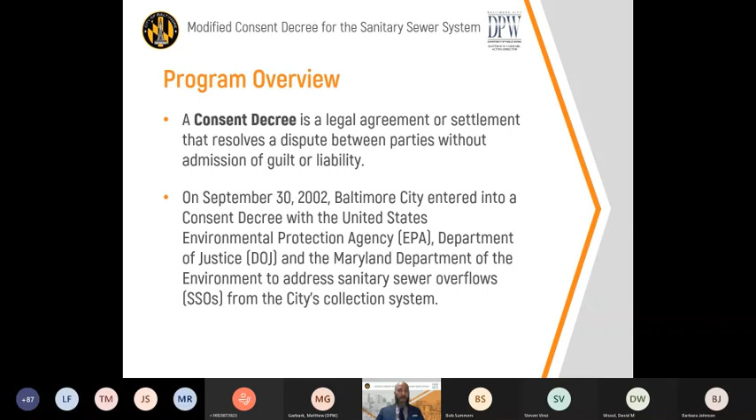So once we understood the scope of this almost 10-mile hydraulic restriction, it forced the city to reevaluate its plans to remediate the sanitary sewer system. And we went back to the drawing board with EPA and MDE and modified our consent decree.

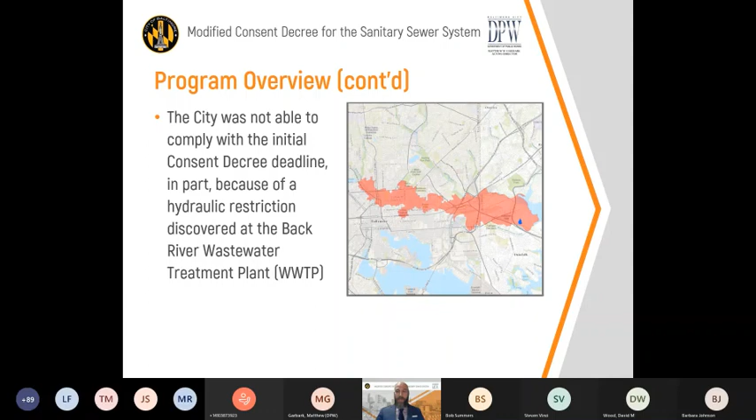So we're here today to do a couple of things. First, we want to give you some background on the modified consent decree. We want to provide you with updates on the work that we're doing to remediate the sewer system, really connect you to the people responsible for that work, and then we want to answer questions that you might have.

Now, when we drafted the modified consent decree, we didn't simply add a few more projects onto what we agreed to do in 2002. We did add more projects, specifically the Headworks project that is designed to eliminate that hydraulic restriction, but that's not all we did. We developed a new strategy that implements adaptive management concepts as seen in our two-phased approach, which creates a specific performance goal for our system. So we're not just completing a list of projects, we're completing existing projects plus the Headworks project.

That should reduce about 83% of the sanitary sewer overflow volume that we've experienced. Then we're going to step back, evaluate the impacts those projects have had on our system. And then from there, we'll design and complete any further projects that are needed to establish a certain level of protection, that performance standard. We want a 5-year level of protection citywide and a 10-year level of protection for sensitive areas.

Now, we also extended the time frame for compliance, and we did that for 2 reasons. First, we're doing more in the way of work, and I think we're making sure that we're doing things correctly. And extending the time also allows us to do work for less money. We only have so many contractors doing this type of work in the area, so we did not want to get artificially high bids for our projects by stressing that market. We want to stretch our ratepayers' money as far as we possibly can.

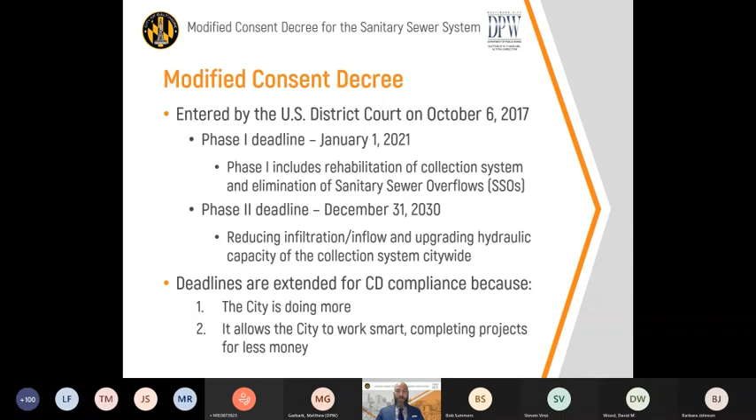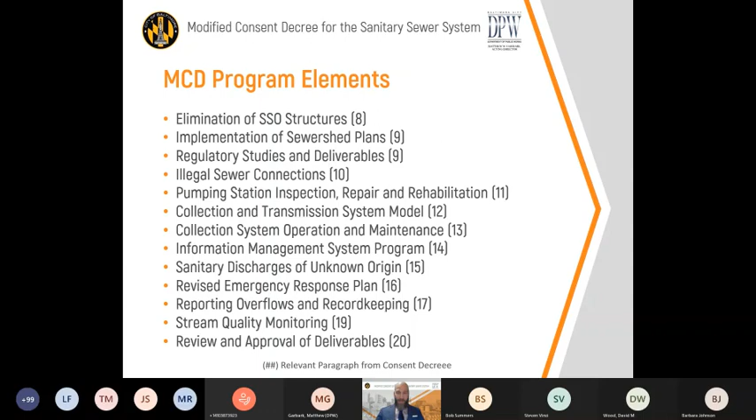Again, the modified consent decree is a relatively complex legal document, and it addresses the sanitary sewer system in a holistic manner. The various requirements are broken down into separate paragraphs, and tonight we are going to walk through some of those requirements. And the first will be paragraph 8, which addresses sanitary sewer overflow structures.

So SSO structures are essentially pressure releases that were designed into the system before the Clean Water Act was enacted. When a pipe section reaches its capacity and is unable to transport sewage, an outfall was constructed to discharge that sewage to a nearby stream. It had its purposes from an engineering standpoint, but it's certainly not good for water quality. It's certainly not the way we design the system today.

So we're going to eliminate them, but we just can't seal them up. We have to ensure that the system has the capacity to handle the expected flows. Thus, we have to monitor those flows, and then we have to make sure we design an appropriate fix.

Now, to date, we have eliminated 60 of the 62 structured overflow points identified in the 2002 consent decree. The 2 remaining SSO structures discharged to the Jones Falls. We will be able to eliminate them once we fully construct the Headworks project and ensure that we have eliminated that hydraulic restriction. We have subsequently found an additional 15 overflow structures, and we've been able to eliminate 6 of them.

One of which was eliminated this past year, and I believe that was in the Herring Run sewer shed. That leaves us with 11 SSO structures that we're currently monitoring, and we have approved plans in place to eliminate all of them, and we can start evaluating if it's safe to eliminate these structures as soon as some projects are completed.

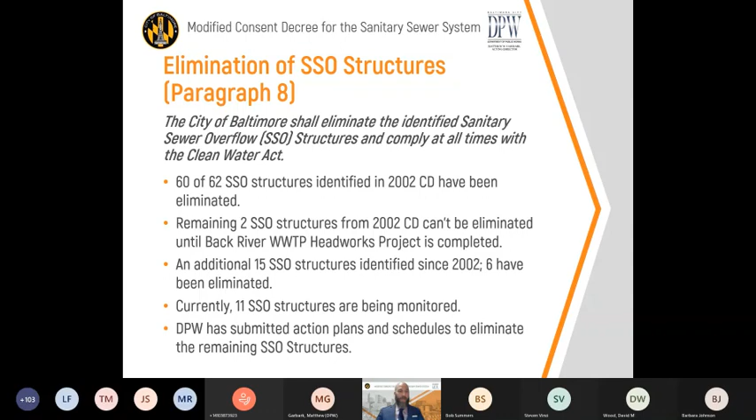And that brings us to paragraph 9, which are phase 1 projects. And as discussed earlier, the modified consent decree utilizes a 2-pronged approach.

The first step here is to address a list of projects that we had set forth in Appendix B of the modified consent decree. The deadline to complete the last of these projects was December 31st, 2020. So of the 40 phase 1 projects, we have experienced delays in about 7, and that has been caused by a number of different issues.

We have had legal disputes. Project changes have been necessitated in order to limit impacts to our parks. We have had a couple of projects that have encountered unforeseen conditions during construction. And then we've also had impacts caused by the COVID pandemic.

Nonetheless, over the past 12 months, we have completed 6 projects and are pushing hard to finish that outstanding work. Once phase 1 is complete, DPW will then be able to fully evaluate the progress made during phase 1, and then we can start changing the focus that we have.

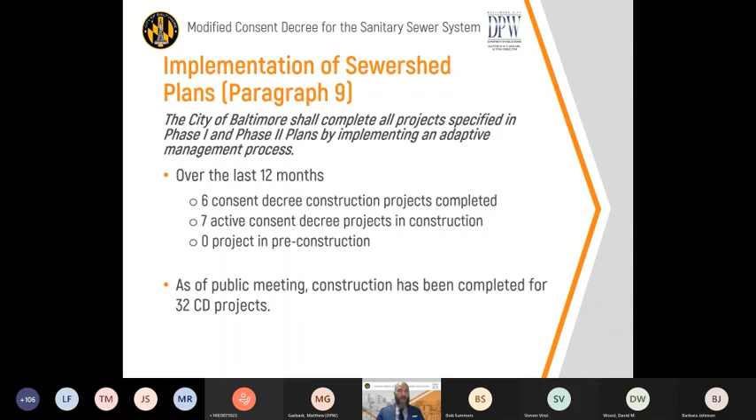Because some of this ongoing work is limited, we've actually already begun working on our post-construction flow monitoring, and we've even begun designing some of the phase 2 projects, and we'll talk about that a little bit later in the presentation.

Here we have some examples of the types of projects that were set forth in phase 1, and the focus really was the remediation of the system.

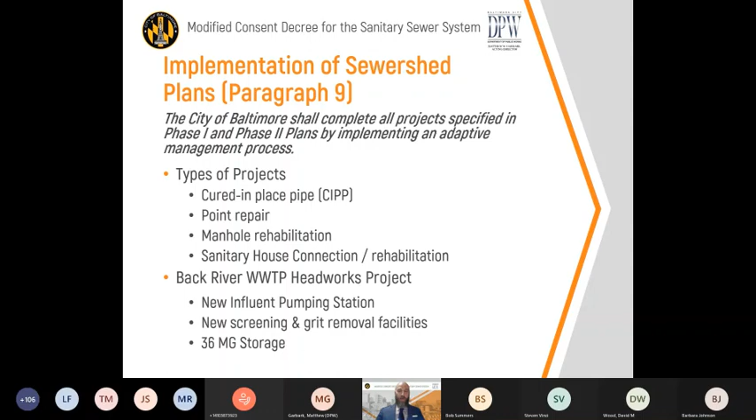Now, in addition to the construction projects, the city is required to provide some additional deliverables to the state and federal regulators. As discussed, we're nearing the end of phase 1, and we are preparing our post-construction flow monitoring plan. We've been installing additional flow monitors in our system in order to get that data to determine how our system's functioning now. We've also submitted timely quarterly progress reports to the state and federal regulators.

All of these are posted on our website for public review, and you'll hear me say this a lot tonight. We're proud of the work that we're doing, and we want you to utilize DPW's website to stay updated on our progress.

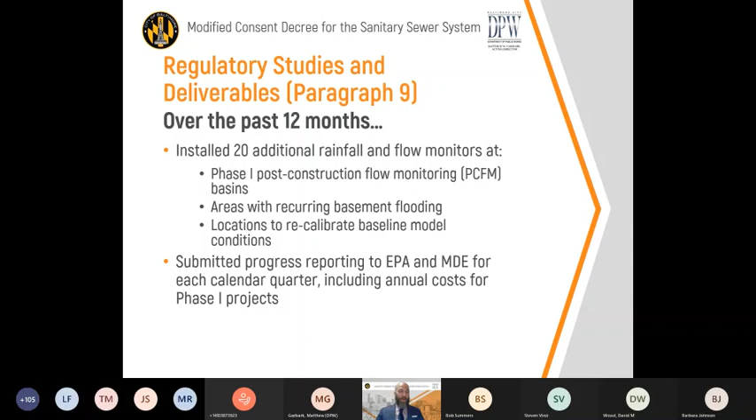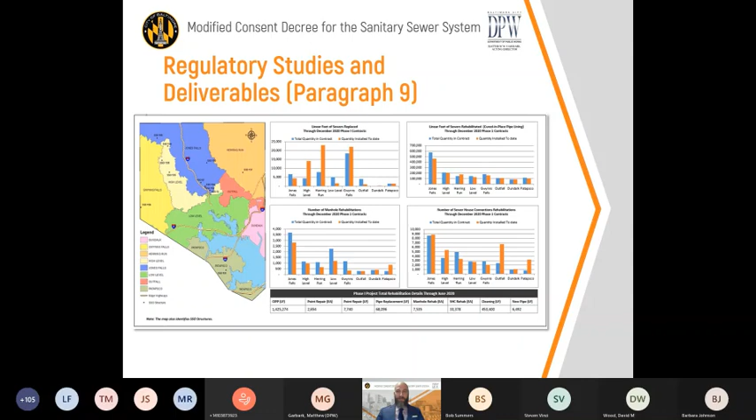Now, our biggest phase 1 project is the Headworks project at the Back River Wastewater Treatment Plant. The Headworks project will eliminate that 10-mile hydraulic restriction. It's an expensive fix, totaling approximately $430 million, but per our hydraulic model, the phase 1 projects will eliminate about 83% of the SSO volume that we've been experiencing, and Headworks is really responsible for the lion's share of that reduction.

DPW has completed the new screening and grit removal facilities, and most importantly, has constructed the new pumping station that contains 8 pumps with a combined capacity of 750 million gallons a day. All the pumps have been tested, and I'm happy to report that the pumps were activated in December. So we have flows through the new Headworks project into the Back River wastewater treatment plant as we speak.

This has allowed the treatment plant to receive increased daily flows, but the treatment plant itself has a capacity limit. It generally treats on average about 150 million gallons during the course of a year, but it can safely handle flow events as high as 425 million gallons a day. With the addition of these pumps, we can utilize that whole 425 million gallon a day capacity.

The city is also poised to put holding tanks into service that will allow the plant to store an additional 36 million gallons to accommodate even higher daily flows.

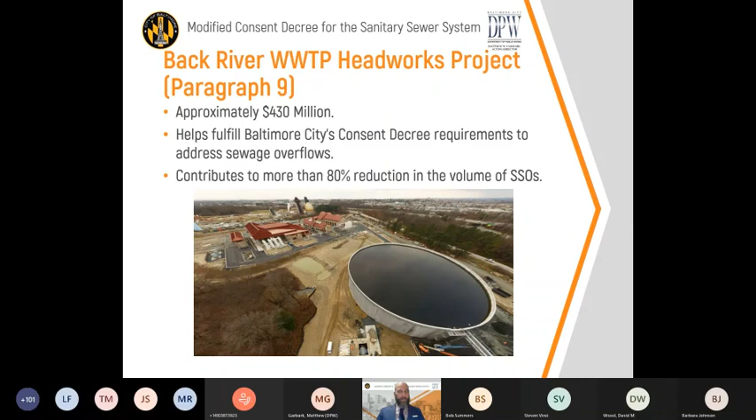Paragraph 10 addresses illegal connections. The city has a plan to eliminate illegal sewer connections when they're identified, and these are often clear water connections, things like roof leaders, which direct stormwater flows into the sanitary sewer system. As we discussed, we don't want the capacity of the sanitary pipes used up by stormwater or groundwater. If the capacity of the sanitary sewer mains are exceeded due to the introduction of those clear water discharges, the system can experience overflows.

Most of the city's enforcement actions occurred in the early phases of the 2002 consent decree. So thankfully, we did not find any new illegal connections in 2020, so no enforcement was necessary.

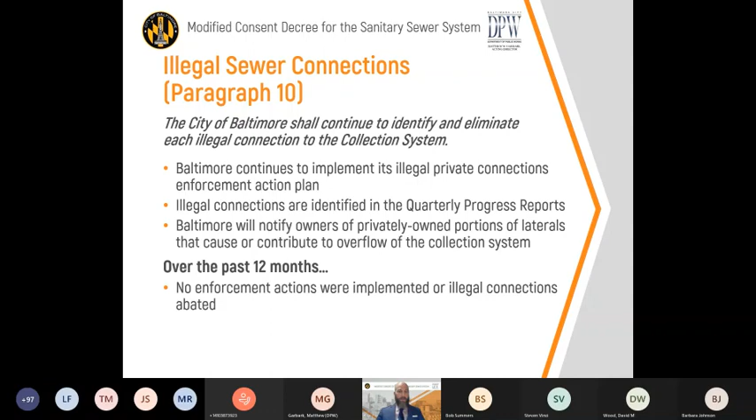DPW is continuing to look after its pumping stations. The city is not flat, so pumping stations are used to push sewage over higher elevations so then they can gravity flow. And I'm happy to report in 2020, we had no overflow events or any events that could have resulted in an overflow in 2020.

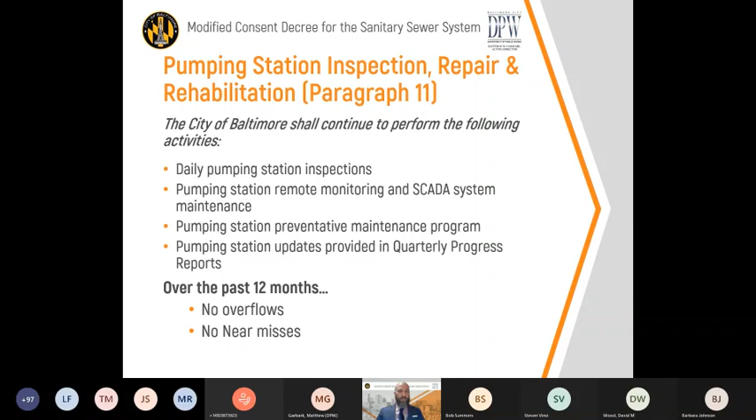One of the most impressive tools the city is utilizing is our hydraulic model. The model helps us predict how the system functions in different situations, so it is necessary to help us determine the impacts of our phase 1 projects on the system, as well as planning for phase 2.

We even use the model to evaluate impacts caused by individual rain events. Over the past 12 months, we've utilized the model to develop our post-construction flow monitoring plan, which will allow us to evaluate the effects of our phase 1 projects. We've already done pilot studies using rehabilitated portions of the sanitary system, and the model is a necessary component that allows us to determine if we can eliminate those overflow structures. So we certainly rely on it a lot.

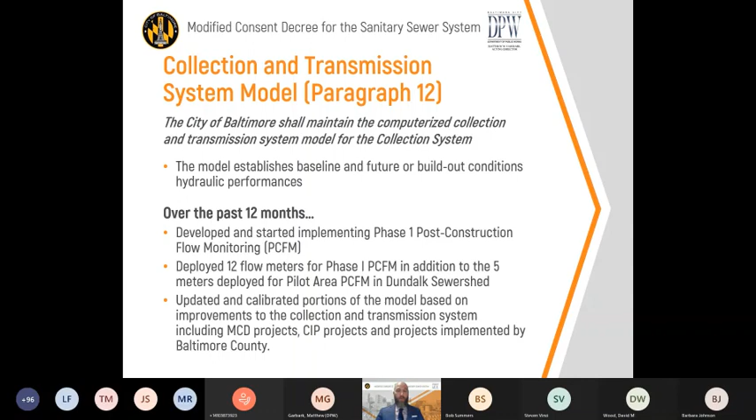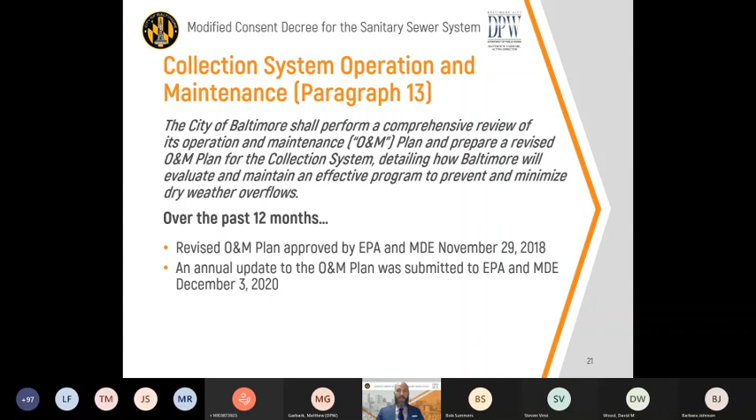That brings us to our operation and maintenance. DPW established the Office of Asset Management to work on proactive maintenance of our utilities. Our asset management staff prepared our O&M plan, which was approved by the regulators in 2018, and we did an annual update submitted at the end of 2020. You can find all these updated documents on the website along with the O&M progress report.

The goal here is really to switch from a reactive mode, where we're responding to pipe failures or chokes in the system, to a proactive mode where we're conducting preventative maintenance on our system.

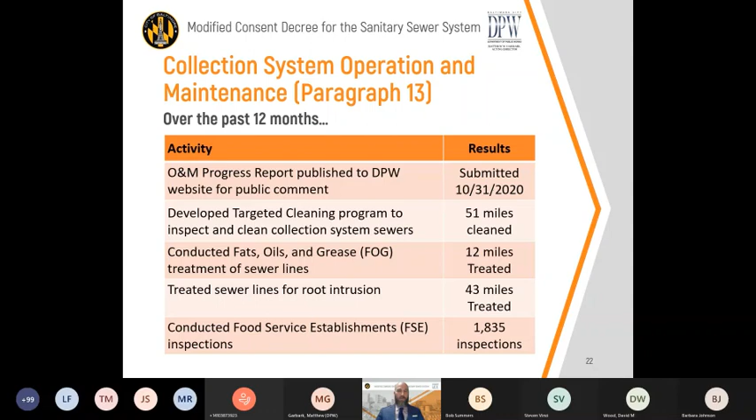As part of our effort to work smart, we continue to utilize technology such as a mobile app to help our maintenance workers access CityWorks, which records, reports, tracks, and resolves our customer service requests and work orders. We've continued to expand our use of CityWorks and have not experienced any disruptions to our operations during the pandemic, so we're happy about that.

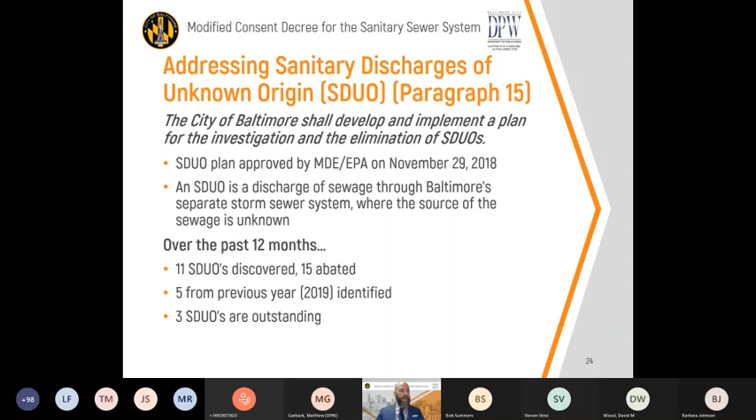DPW's plan to address sanitary discharges of unknown origins, or SDUOs, was approved by the regulators in 2018. We've continued to identify and abate SDUOs as we find them, so we're making progress. We discovered 11 SDUOs over the past year, we've abated 15, which suggests some were holdovers from the previous year, and we have 3 SDUOs that are outstanding.

We submitted our revised emergency response plan to the regulators in April of 2018, and we are still working with the regulators to finalize that document. In the interim, we continue to conduct annual training to ensure our staff is well drilled in the ERP requirements and protocols.

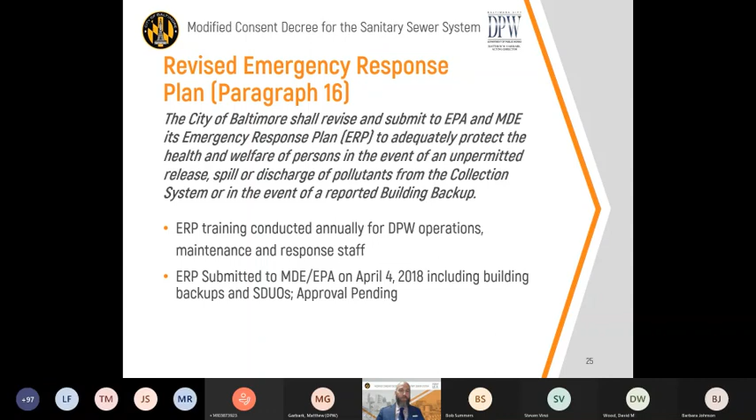We are continuing to track and report on sewage overflows, and that data shows our efforts are working. We've seen a pretty consistent reduction in SSOs since 2012, a 30% reduction from 2012 to fiscal year 2020.

We did have that uptick in fiscal year 2019, but that captures a lot of the rain we received in the summer of 2018. As you might recall, 2018 was a record year for rainfall in Baltimore, so we expected to see that increase. But we are seeing those numbers coming down once again last year.

What is interesting is that we're still seeing a significant number of dry weather SSOs. In 2018, approximately half of the SSOs were dry weather SSOs. In 2019, due to the wet weather, that percentage was reduced to about a third, but we're still seeing about 40% in 2020 of the SSOs that we experienced were dry weather.

So even though we're making progress and doing a significant amount of work to proactively maintain our system, we can always use the public's help here. Properly disposing of fats, oils, and grease and other waste helps prevent chokes from forming within our system, and reduces the maintenance we are required to do.

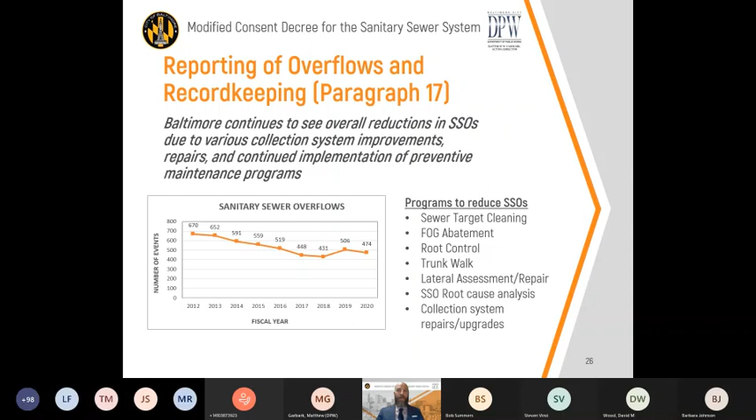Residents can also help by maintaining cleanouts on their properties, to allow the city easier access to maintain lateral connections. We have materials available on the consent decree page of DPW's website, and we'll also have some at the learning station at the end of the presentation.

The city continues to monitor water quality around the city under our Municipal Separate Storm Sewer System Permit, our MS4. DPW conducts ammonia screening on a weekly basis, and stream impact sampling is conducted monthly. This information provides general data on water quality, not specific information on sewer overflows, because we have a lot of contributors that can impact water quality.

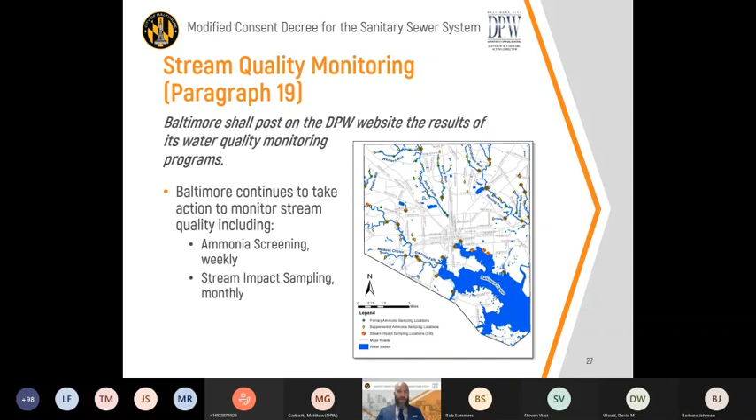Development activities, human behavior, changing regulatory schemes, historic pollution, weather patterns, and activities elsewhere in these watersheds all play a role. It's important to note Baltimore County is also under a similar consent decree, and they've been diligently working to improve portions of their shared sewer system. Water quality data really captures all of these factors, so there's not a direct causal relationship between water quality and the reduction of SSOs or the elimination of SDUOs, but we can still look at long-term trends.

In Baltimore City, our waterways are frequently impaired for bacteria. In freshwater systems, we look at E. coli as the indicator. What the data shows is that we are not where we want to be yet. We're not below that red line on the graph, which indicates the standard at which we would be safe for recreational uses in the stream systems.

These stream samples are taken during dry weather conditions, and although there is not a direct correlation to SSOs, we may still be seeing impacts from dry weather overflows. So we can still do more to reduce overflows: properly dispose of FOG, keep trees away from our sewage lines, and not flush wipes. All those things will help reduce some of the overflows we are experiencing, and we all need to do our part to keep the public system working.

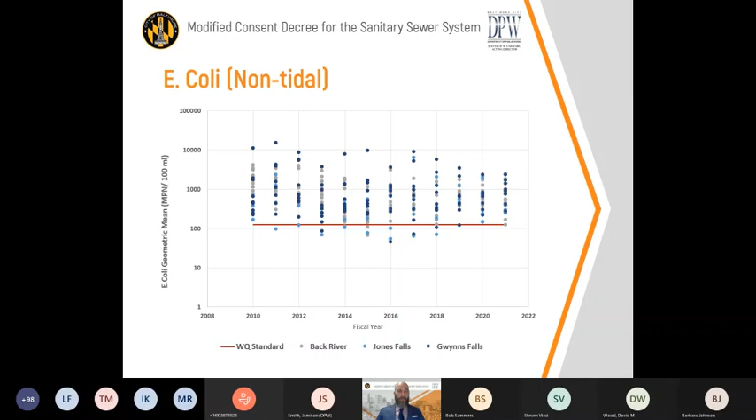We've seen similar data for our tidal waters. In this case, we're measuring Enterococcus, which is a different bacteria. Nonetheless, the results are similar - we're not where we want to be yet.

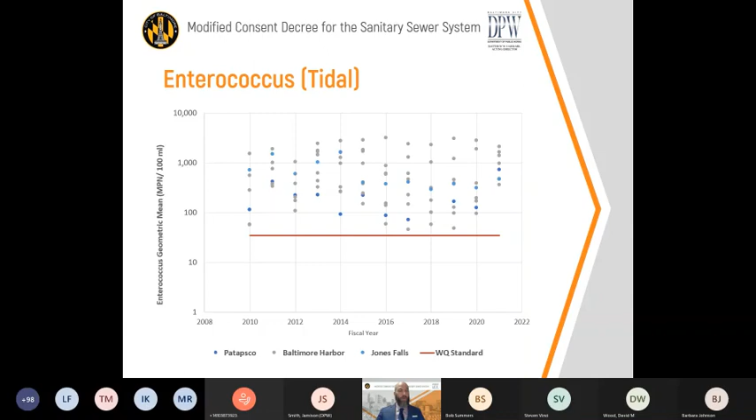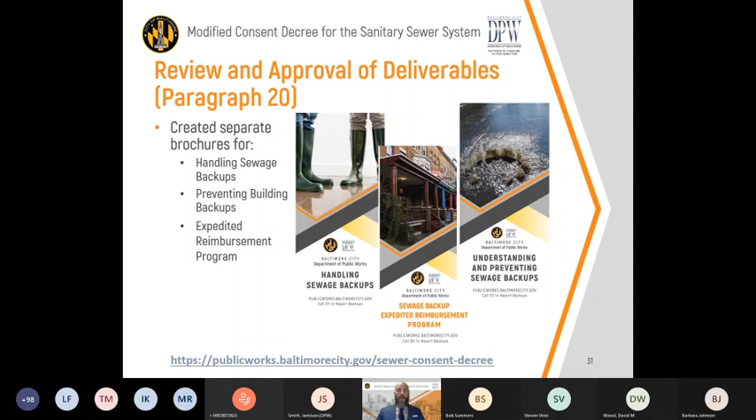That brings us to paragraph 20 and some of the public outreach that the city is doing. The city has produced new brochures to help educate the public on the reimbursement program, how to safely clean backups if you experience backups in your basement, and maybe most importantly, how to prevent them.

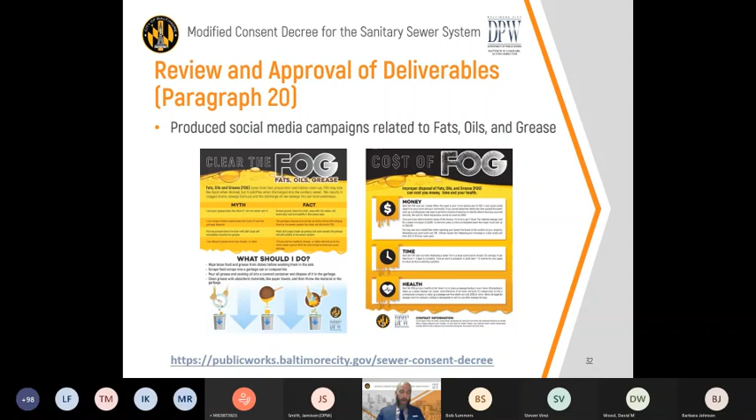The city has also produced social media campaigns to help educate the public regarding the proper disposal of fats, oils, and grease. As noted previously, we update our website with deliverables when they are submitted to our regulators, as well as other information aimed to increase public engagement. Please utilize our website to keep updated on the work that we're doing, and you can even sign up to receive notifications on our webpage.

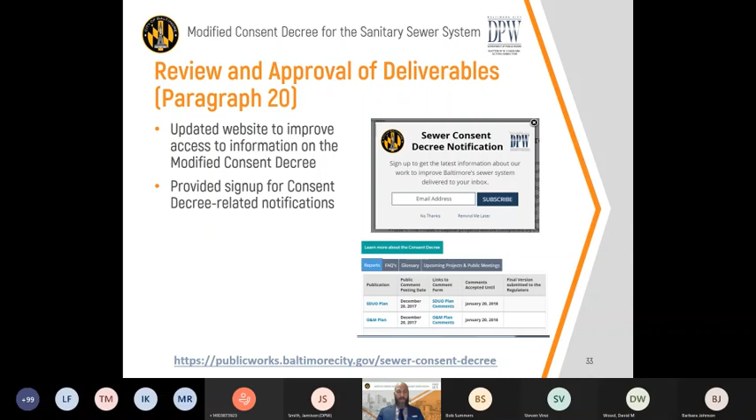Phase one of the consent decree required almost $3 billion in construction work, and we still need to complete additional projects under phase two. Recognizing the amount of work being generated, DPW has taken the time to help develop minority, women, and disadvantaged businesses to start competing for that work.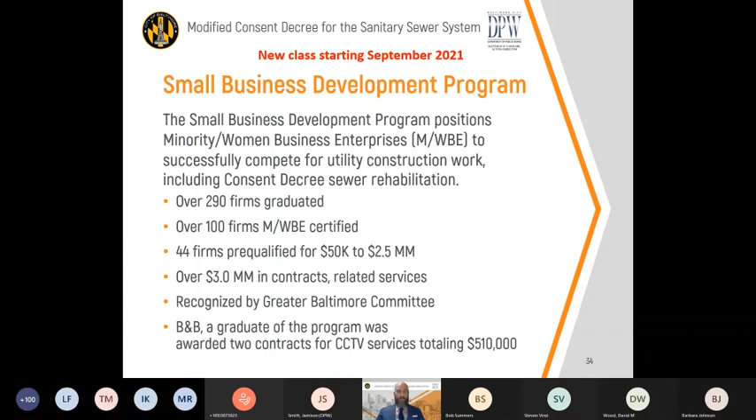This year, due to the pandemic, we provided an online course, but it still included construction management training with instruction on estimating and bidding, management best practices, program management, contract administration, and bonding. Participants also obtained support in getting certified and pre-qualified with the city, which is sometimes a difficult task for new businesses. We want to have folks out there competing for jobs, and that competition can only help us get this work done better and cheaper. It's been a very successful program and one that we want to continue, so we will have a new class forming in September.

So in review, the city is doing more to prevent sewer overflows through its modified consent decree. We're thoroughly evaluating our collection system, and especially now that we're getting to the end of phase one, we're doing a lot of work there. We're trying to work smart, completing projects in a way that's economical for the people of Baltimore, and we're trying to reinvest and help build small businesses.

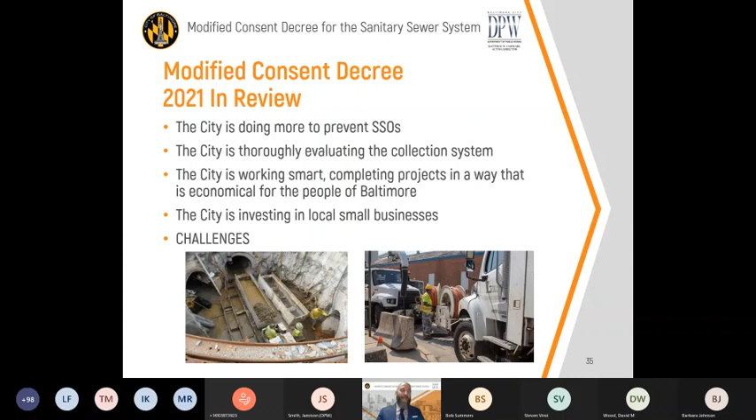But that's not to say 2021 was not without its challenges. Obviously, the pandemic and other delays we've experienced have required us to continue work past the December 31st, 2020 deadline. But we're trying to limit the impacts of those delays. We're able to already begin planning our post-construction flow monitoring, and we've even undertaken the design of some of our phase two projects where they're siloed and not impacted by those delayed projects. So we're still working ahead and trying to make sure those delays aren't going to have impacts on the next phases of our program compliance.